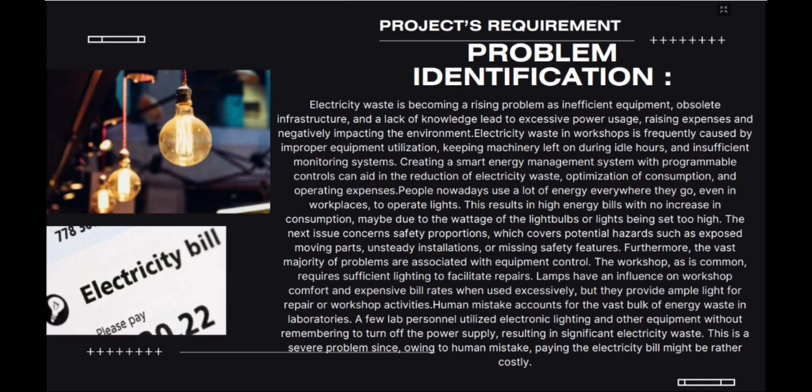Electricity waste is becoming a rising problem as inefficient equipment, obsolete infrastructure, and a lack of knowledge lead to excessive power use. raising expenses and negatively impacting the environment.

Electricity waste in workshops is frequently caused by improper equipment utilization, keeping machinery left on during idle hours, and insufficient monitoring. Creating a smart energy management system with programmable control can aid in the reduction of electricity waste, optimization of consumption, and operating expense.

People nowadays use a lot of energy everywhere they go, even in the workplace to operate lights. This results in high energy bills, with no increase in consumption, maybe due to the wattage of the light bulb or light being set too high.

The next issue concerns safety precautions, which cover potential hazards such as exposed moving parts, and unsteady installation or missing safety features. Furthermore, the vast majority of problems are associated with equipment control.

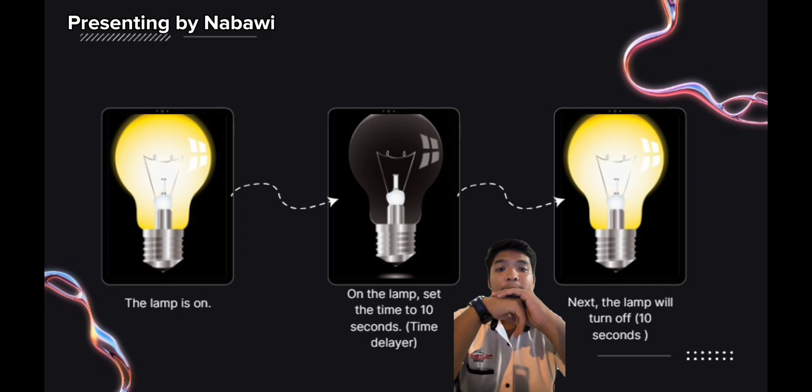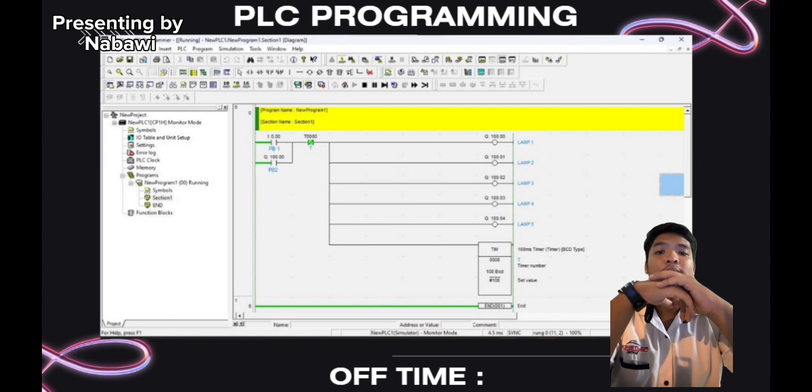This diagram shows the PLC circuit of the lamp when it is turned off, where we can see both push button 1 and push button 2 are not pressed at all.

Next, this diagram shows the PLC circuit of the lamp when it is running, where we can see only push button 1 is pressed to turn on the light.

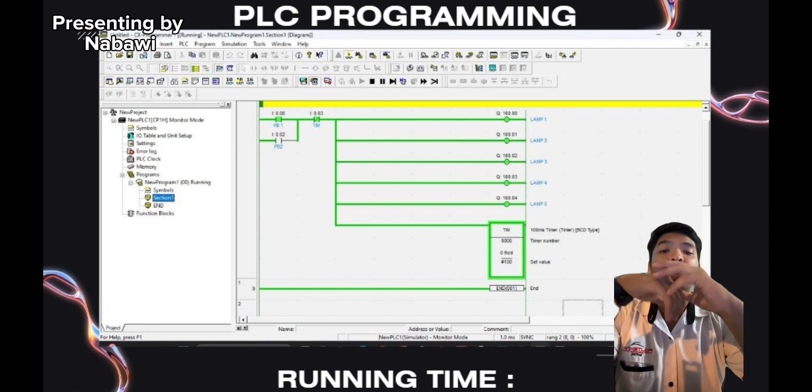Conclusion: Careful hardware setup, wiring, comprehensive testing, and methodical troubleshooting procedures are required when installing a light timer in a PLC system. A solid and effective light timer system can be installed by following a step list, from assembling the parts and installing them to verifying functionality and troubleshooting.

Throughout the procedure, we regularly refer to documentation and safety standards to guarantee trouble-free installation and to facilitate future maintenance. Successful implementation requires careful attention to detail at each phase, promoting electrical safety as well as operational functionality.

It also includes creating a lighting timer system that uses Programmable Logic Controller (PLC) technology, providing great benefit for the efficient and controlled use of light energy in various contexts.

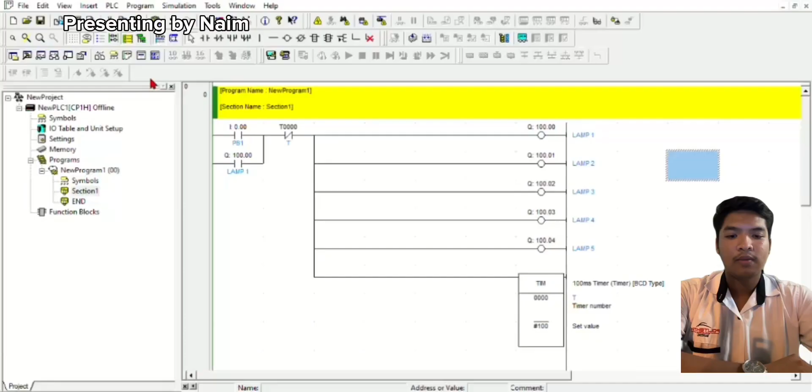We will now move to the result section, where I will show a PLC circuit demonstration video. Let's take the same example: when the workers have not come to the workshop, the lights are turned off.

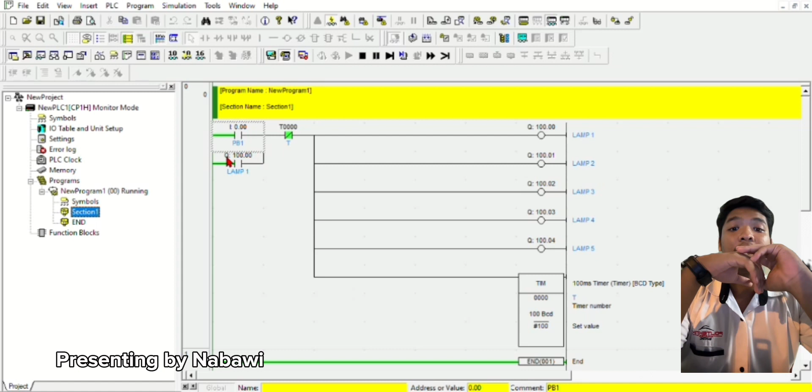After the workers come, they will press the light button, which is push button 2, and when they have finished their work, for example if the work time is over, the light will close by itself automatically.

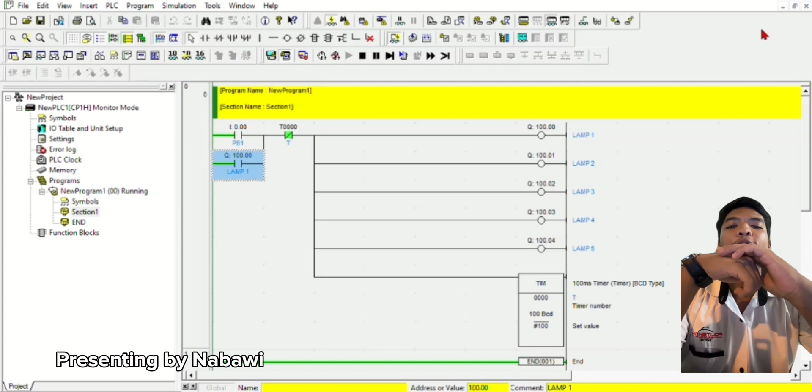We take this 10 second example just to show the function of the PLC circuit. In truth, this timer is set for 8 hours, which is in line with the working hours.